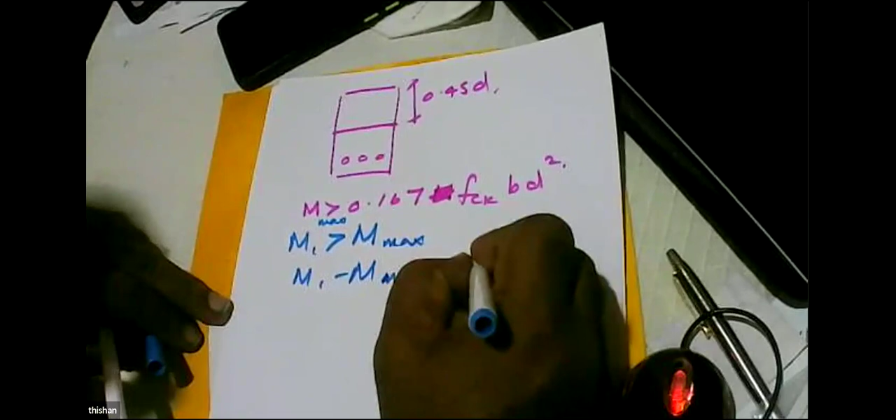Right, so basically what I said was, if you have a huge moment, a moment greater than given by 0.167 FCK BD squared, then the depth to the neutral axis is 0.45D, and we'll need some reinforcement to carry the moment, giving a moment M1 greater than M max. M1 minus M max is the extra moment, and it has to be carried by the compression reinforcement, A S dash, FYK divided by 1.15, multiplied by D minus D dash. So this is force multiplied by lever arm.

So today is 17/1/2024, Civil Engineering Sectional Committee lecture series, lecture 7, page 1.

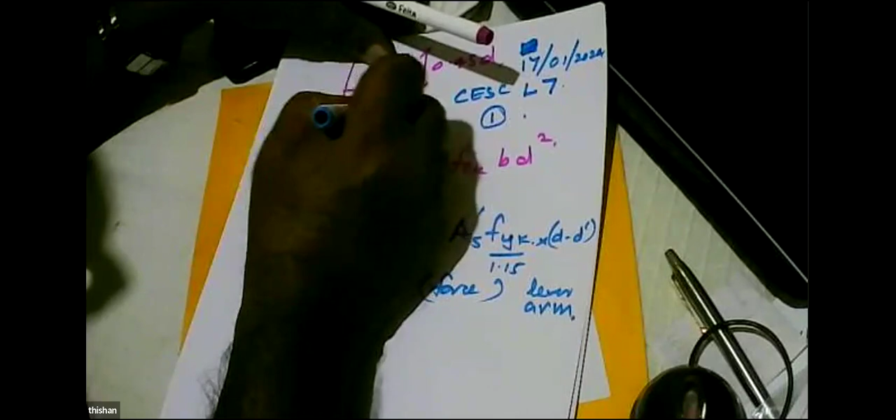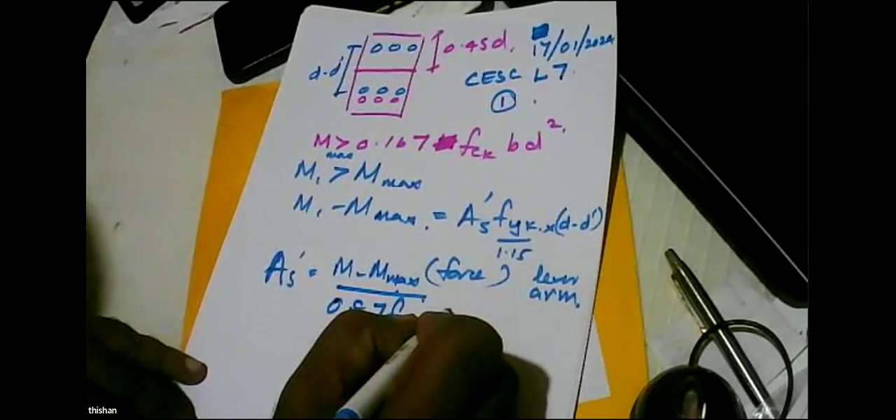So we need extra reinforcement, and this is D minus D dash, and that reinforcement can be found as A S dash M1 minus M max divided by 0.87 FYK D minus D dash. So straight away you can find the extra reinforcement needed for the beam to be doubly reinforced, because the moment exceeds the maximum moment capacity as single reinforced.

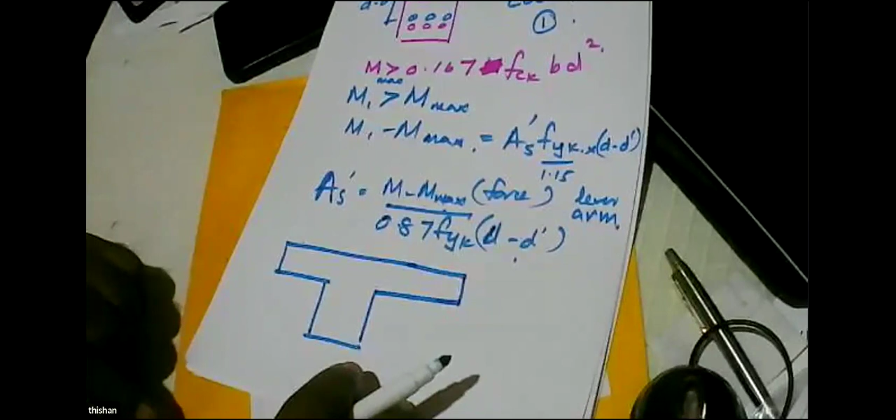Then I said, okay, these are not economical. Why? Concrete is a cheaper material, steel is an expensive material, so we should not use steel to carry bending moment. So what is better? Flange beam. But the important thing is the depth to the compression zone must be inside the height of the flange. Is that clear, Bandhuga? Yes, that is clear.

So I checked with our IT department. They told me it might be some issue from the computer, and they have given all permissions. Anyway, sir, we can clearly hear you now, no need for the phone.

Your background is muted, your video has stopped. Doesn't matter, this is working today, we will continue like this. Okay, right sir, okay.

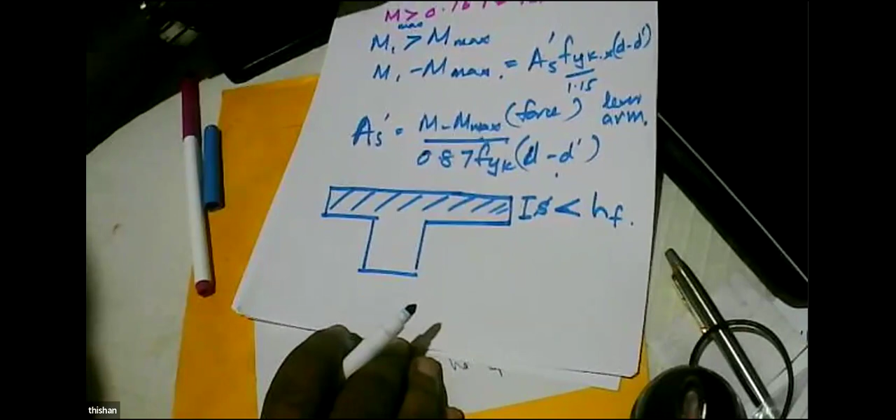So now the question. We have a continuous beam. So how does it deform? It deforms like this. So here tension in the bottom, tension at the top, tension in the bottom, tension at the top, tension in the bottom.

So here, if it is a flange beam, here your tension, so what is effective is only this. Here, tension is here, what is effective is this. That means it's a flange beam. In the span it's a flange beam, over the support it's a rectangular beam. Is that clear, Bandhuga? Yes, that is clear, sir.

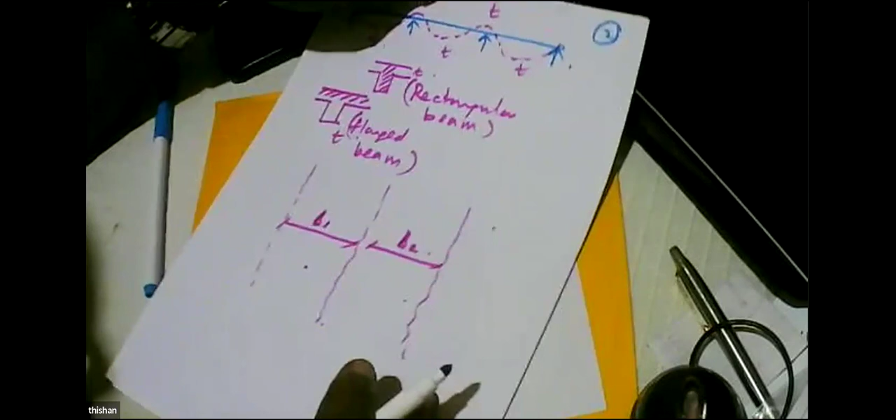Right, okay, excellent. Now let's look at the scenario. These are beams, so you get these as L1, L2, and so on. Sorry, B1, B2. Right, so this is a plan view, and the slabs are like this. Then we have the supports, and these supports are the same as these ones. These are supports, so the beam is continuing like this. So these are L1, L2, L3.

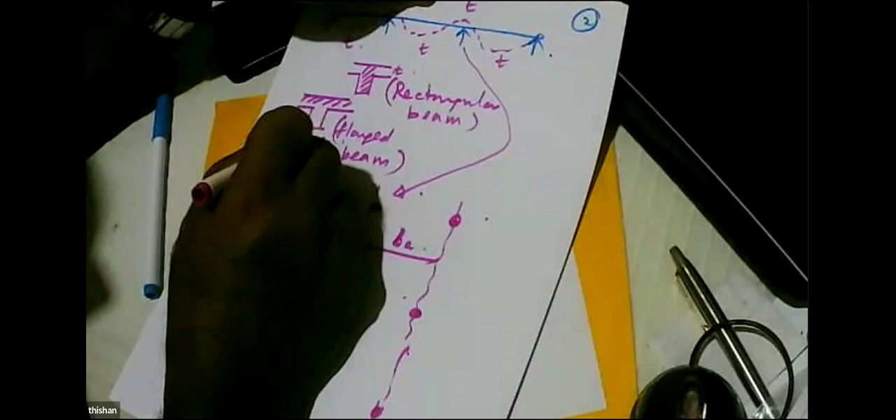Now, what happens is we have an effect called shear lag. And shear lag makes plane sections not plane. Plane sections not plane. What do you mean by that? What is the meaning of that? You have learned this formula. What is that formula? The famous Bernoulli equation, we generally call it the Bernoulli formula.

And here, what is the assumption? Plane sections remain plane, strain diagram like this. But what happens is this bending somewhere here, if you draw the stress distribution in the flange, it will take a shape like this. So that means you can't say the stresses are uniform in the flange. They are more close to the support or the beam. So we say we have an average value, but we have a restricted width.

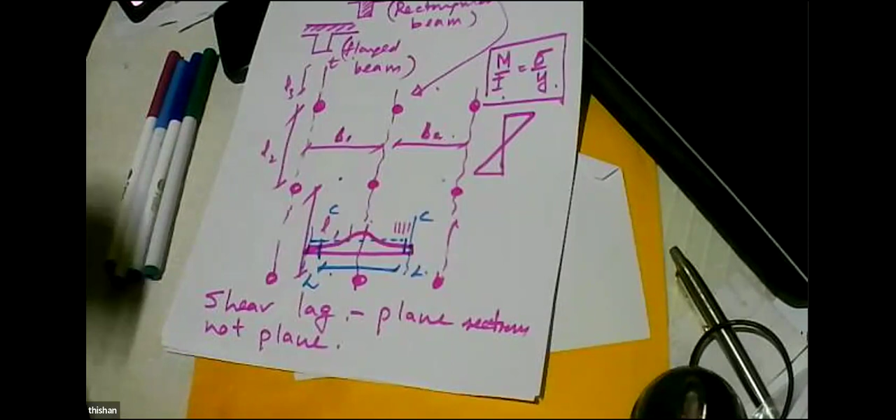If you haven't learned about shear lag, it will make the plane sections not plane. That means the stresses are not uniform, they are like this. On the flange, they are like this. So we cannot use the full distance from the center line of the slab to the center line of the other slab. We have to have a restricted width.

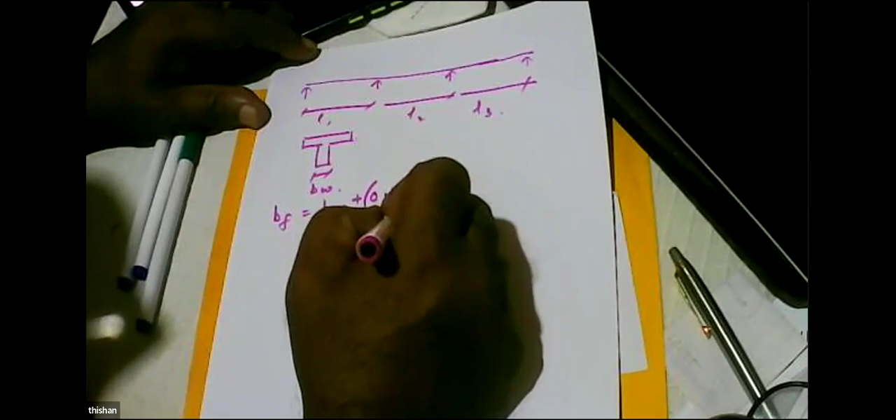So in the British code, finding the flange width is very, very easy. Same as in Eurocode, but Eurocode is a little complicated, but there's nothing to it. So what British code said was, you get L1, L2, L3. So if it's a flange beam here, with web width BW, B flange is equal to BW plus 0.7 times L1 divided by 5. If it's an L-shaped beam, slab only on one side, B flange is equal to BW plus 0.7 L1 divided by 10. Very simple. Now you might ask, what is this 0.7 L?

You draw a bending moment diagram. 0.7 L is the distance between points of contraflexure. Here it should be 0.85 times L. There should be 0.85 times L. Distance between zero moments is called 0.7 L. It is equal to 0.7 L. They have considered it as equal to 0.7 L. Is that clear, Bandhuka?

I think Bandhuka is disconnected. So can somebody else tell me whether it's clear?

Yes, it is clear, sir. Good, please give some feedback because I'm a little concerned whether I have lost the contact. So when I ask a question, just say yes or no, that's enough. So Bandhu, my connection was lost and I just rejoined. I thought your connection was lost. Okay, yes, sir, right.

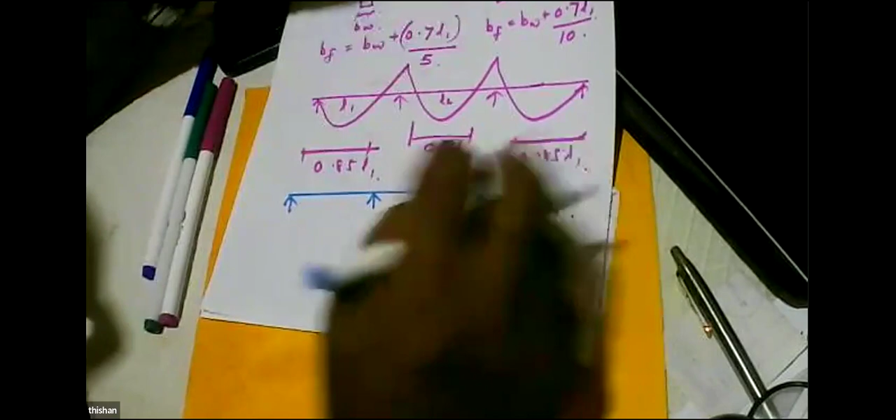So now, Eurocode is different. Eurocode has brought a lot of other parameters. In Eurocode, BF depends on BW, a function of BI and a function of LI. In British code, it's a function of span of the beam. But in Eurocode, it's a function of the distance between the beams and the distance between the supports. So this is the distance between beams, and this is the distance between supports.

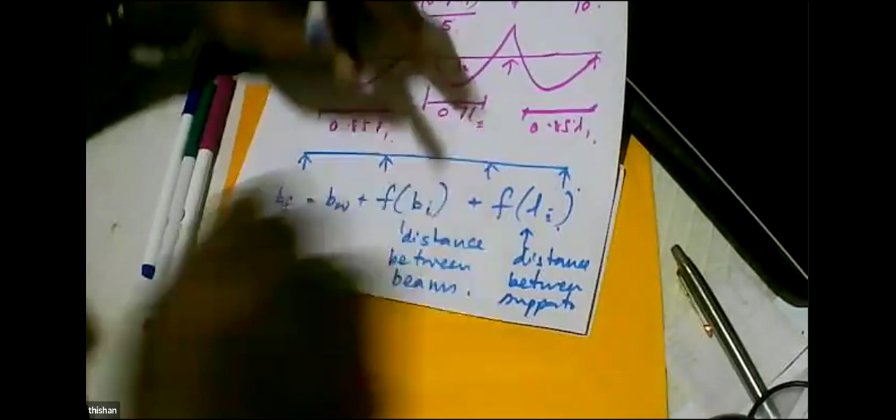Eurocode also gives the same diagram, it cannot change because it's from fundamentals. This is 0.85L, this is 0.7L, so each of these will be 0.15L. Here also it will be 0.15L, and here also 0.15L. Okay, got it?

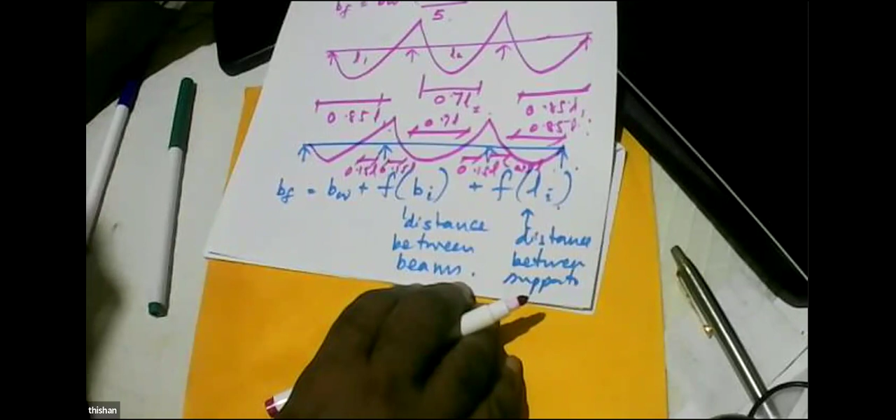Bandhuga? It looks like Bandhuga has again lost connection. Now I'm going to share the screen.

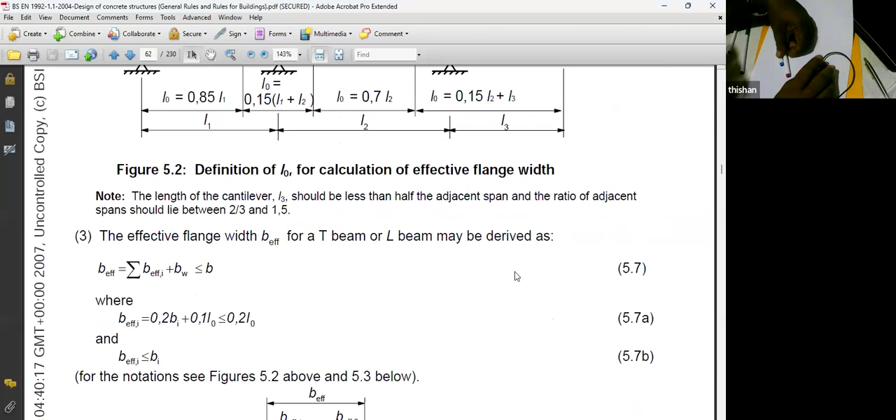Here you go. It gives a lot of diagrams, right? So effective flange, width of flanges, all limit states. Can you see 0.85L, 0.7L, 0.85, 0.15L, or the support?

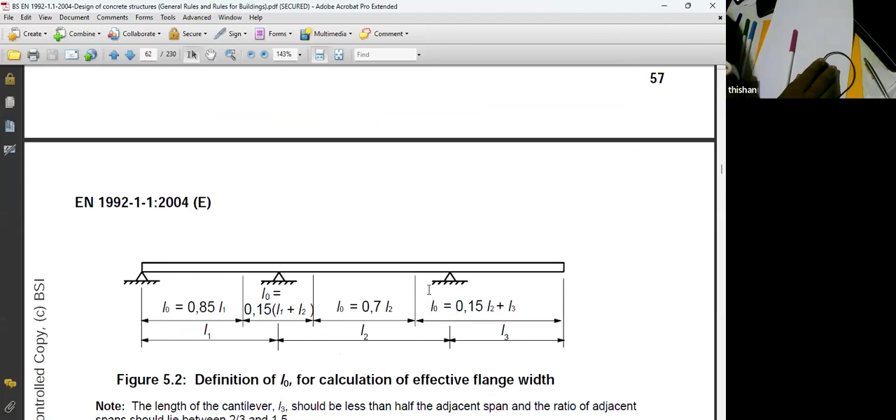And these are for a cantilever. The effective length has to be taken as 0.15 L2 plus L3. So it says 0.2 times B1 plus 0.1 L0, but should be less than 0.2 times L0.

So B effective from one side. So what it says is, if I write it in a simple rule, B flange is equal to B web plus 20% of distance, 20% of span of the slab, plus 10% of distance between point of contraflexion.

So for an example, let's say we are having a beam going like this, and these are 4 meters, let's say 5 meters. This span is 7 meters. The typical situation, this span is again 7 meters, or let's say internal span is 8 meters. So what is the flange width from this side? This is the flange beam.

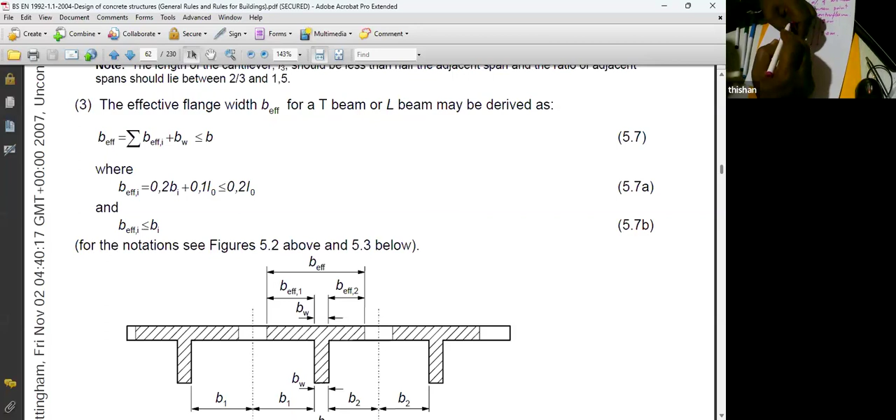What is this side? Sir, excuse sir, we couldn't see the notes, sir. Oh yeah, okay, hang on. Yes, sorry. It's good that you told me.

Right, so the rule is F is equal to BW plus 20% of span of the slab, 10% of distance between point of contraflexion. So what is this side? So BF left, I'll say left, is equal to 20% of 5 meters, 20% of 5 plus 10% of distance between point of contraflexion, 0.7 times 7.0, but has to be less than 20% of 0.7 times 7.

So let's calculate, Madhu, what is this? 1.0 plus 0.49 should be less than 0.98. Is that right, Bandhuga?

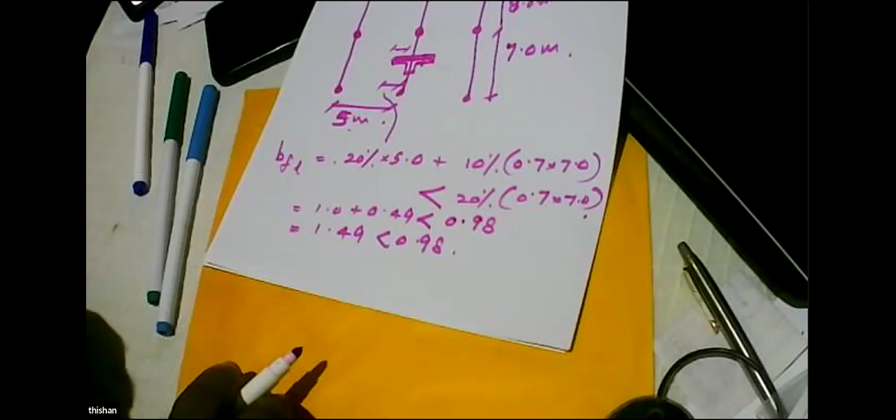So what is governing then? This 20% rule is governing. Is that right, Bandhuga? 20% of 1 is 1, 20% of 5 is 1. 0.7 into 7 is 4.9, 10% of 4.9 is 0.49. And 20% of 4.9 is 0.98. So 1.49 should be less than 0.98. So which is governing? 0.98 is governing.

So the width of the flange beam is, say, this 300 millimeter rib. So this side 0.98, this side 0.98. So 98, 98, so 1.96, 2.26 meters. Is that clear? Yes, sir, right? Because it's symmetrical, I have considered the same value on the other side, so altogether 2.26.

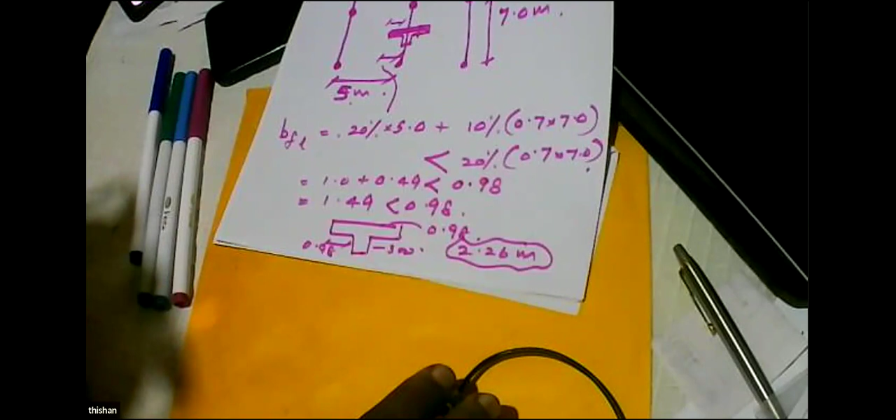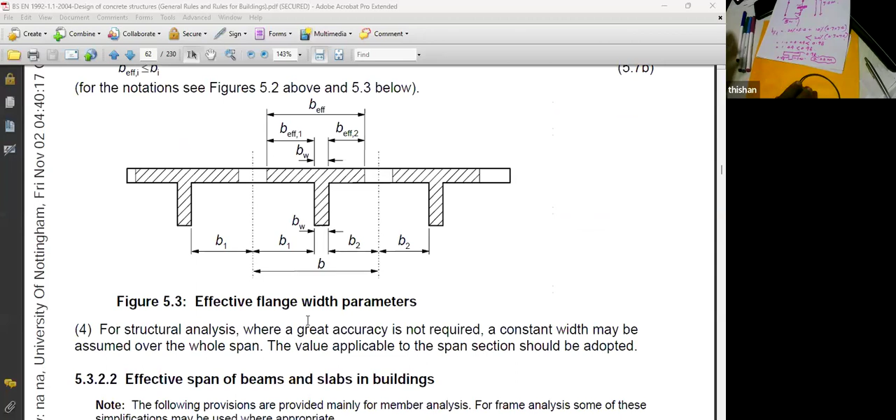So if you look at the diagram, it's very, very complicated, so don't look at it too much. Just memorize the rule, because you see this diagram, there's a lot of things. So you have a diagram, a lot of equations, and then this diagram. But the meaning is simple.

So what would you use, the rule like this or the code? To me, this rule is very simple. So we know 20% comes from the slab, 10% comes from the wing. What do you think, is it easy to remember or difficult to remember? But the total contribution cannot exceed 20% of the beam. That's on one side. The other side, most of the time they are symmetrical, so you can just add up the same value.

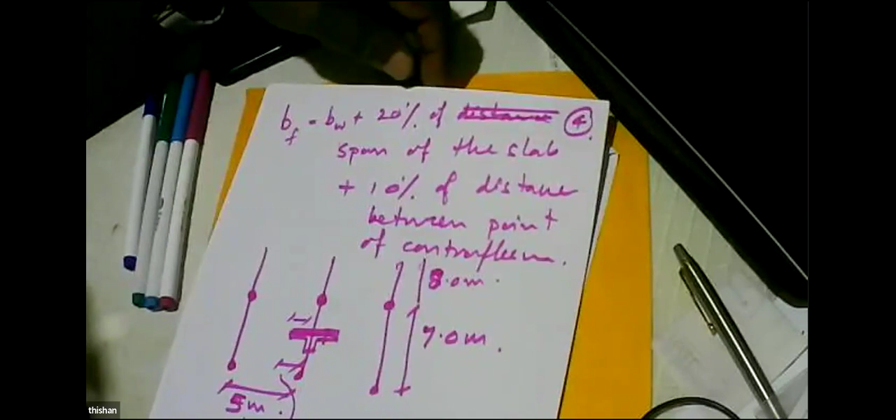What is the opinion? This simple rule, is it simple, or do you want to look at the code? I prefer the simple rule.

Simple rule is easy, sir. Yeah, because now if you are a good designer, you should have all these rules in the code stored properly in your brain, so you don't have to turn to pages in the code and waste your time. You are a good designer, all the rules are known to you, so even without using the code, you can still design. That's the level of ability you have to develop. So I prefer rules, why? Rules allow us to forget about the equation.

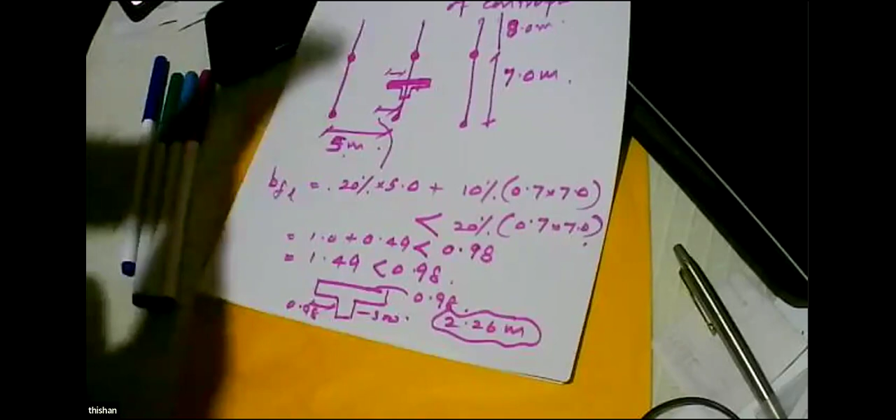Okay, sir. Right, so now let's say this slab is subjected to a load of 13 kilonewtons per meter squared. What is this magic number 13? It's 1.35 GK plus 1.5 QK. Now how do I get this magic number? For a house, what is the magic number? 8 to 9. For an office building, what is the magic number? 11 to 12. If you have extra loads in the office, it can be 12 to 13.

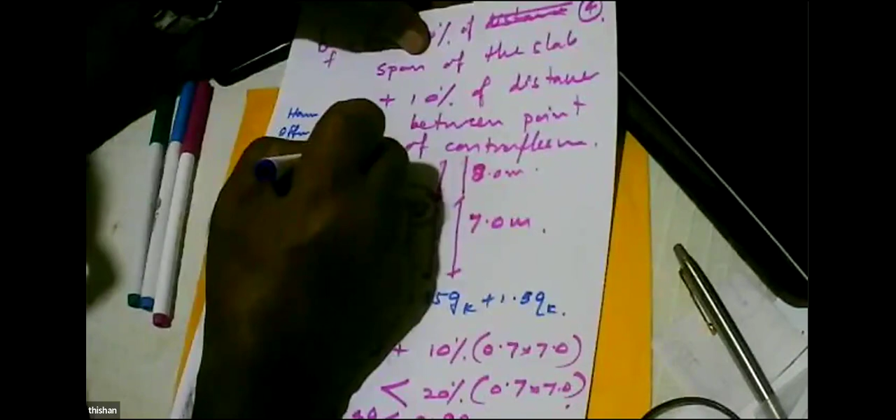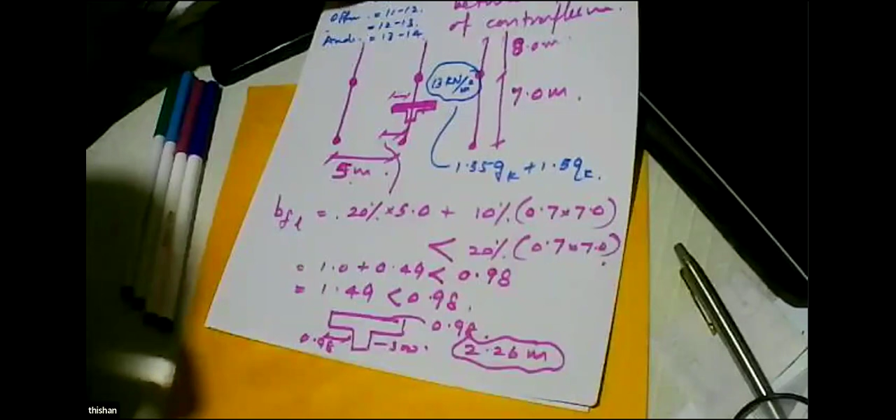You are unmuted and some disturbance is coming. Now I think I am unmuted. This is working. Yeah, now very clear, sir. Now very clear. Yeah, right. Now clearer? Yes, sir, now clear. Okay, well, I have turned off the computer, now I am on phone for sound. Okay, for video, I am on computer. So then it works well because I can monitor what's going on. On the phone I can monitor what's going on, otherwise I don't know what you see. Now on my phone I can see what you see. Okay, sir, right, that's why I use two devices.

That's a good strategy. Even if you are doing a presentation, use that strategy. Have two devices. For the audio, use the phone. For video and all the other stuff, use the computer. Then on your phone, you can see what the other people can see, what your audience can see, you can see on your phone. Then you can keep track of what's going on. It's very easy to do it that way when you are doing a Zoom lecture.

Right, so now okay, let's look at the example. Same example, what is the load? Load is 13 kilonewtons per meter squared multiplied by WL squared over 10. 7 squared divided by 10. What is the moment? 13 into... what is this answer? 13 multiplied by 7 squared divided by 10?

8.1, sir. No, it's 13 multiplied by 7 squared divided by 10. One minute, sir, one minute. 200 something. Seven squared divided by 10, WL squared over 10. Okay sir, oh but you have to multiply this by 5. Multiply that by 5. Yeah, 5 into 13 multiplied by 7 squared divided by 10. Some 200 something. 318.5, yeah, 18.5 kilonewton meter.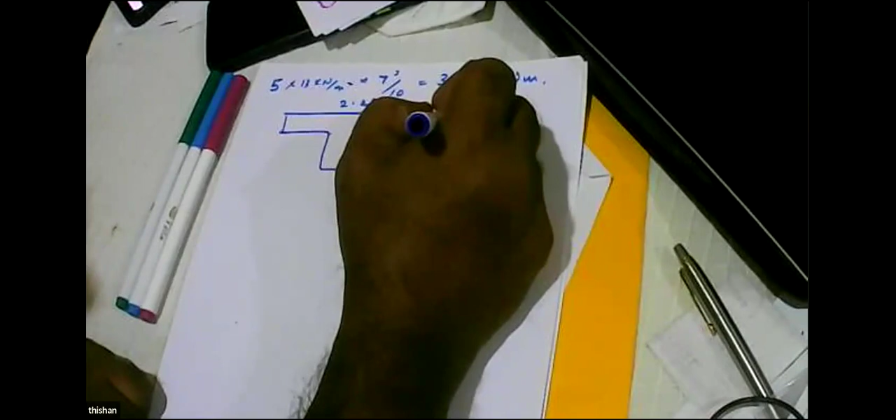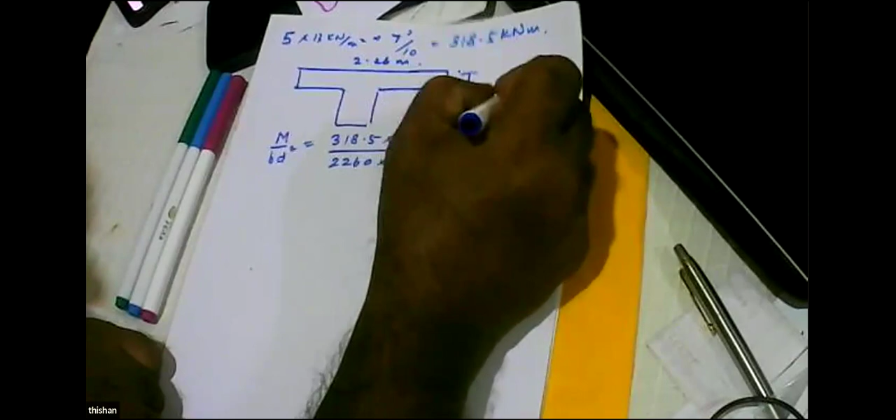Now you want to design this flange beam, and I will assume... so how do I design it? I have to find M over bd squared. I am using the shortcut method, no? 318.5 into 10 to the power 6, divided by breadth 2260, multiplied by, now this is 600 millimeter deep. This 600 is a magic number. You generally don't use a beam depth more than 600 under normal situations. Even up to 9 meters, you will increase the width of the beam and be happy. And generally you don't get spans more than 9 meters in a reinforced concrete building. Maximum span is 9 meters, because beyond 10 meters the design becomes very complicated, with additional deflections and all kinds of problems. So generally we go for a maximum span of 9 meters when selecting the grid, because 9 meters itself is huge, it's a 30 feet span. So depth is 545. What is the value?

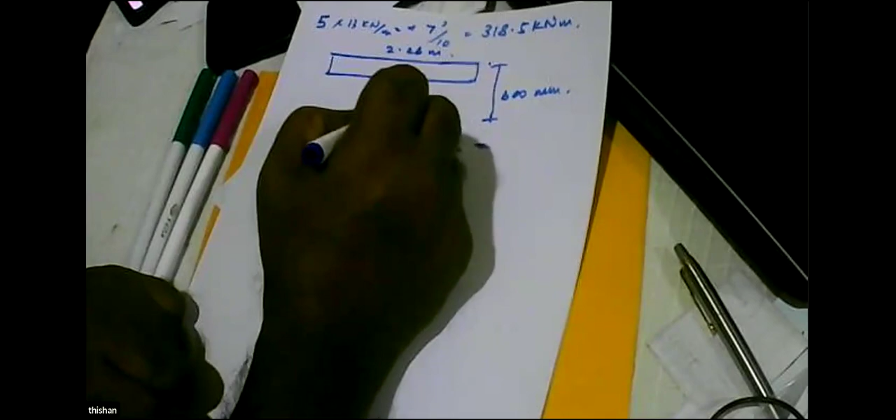So it's 1.2, something, 0.47. 0.47, that's right. Then what is 100 As over bd? Divide this by 4. 0.12. Okay, yes. Then what is A?

A is 0.12 multiplied by breadth 2260 multiplied by 545 divided by 100. What is A? 1,478.05.

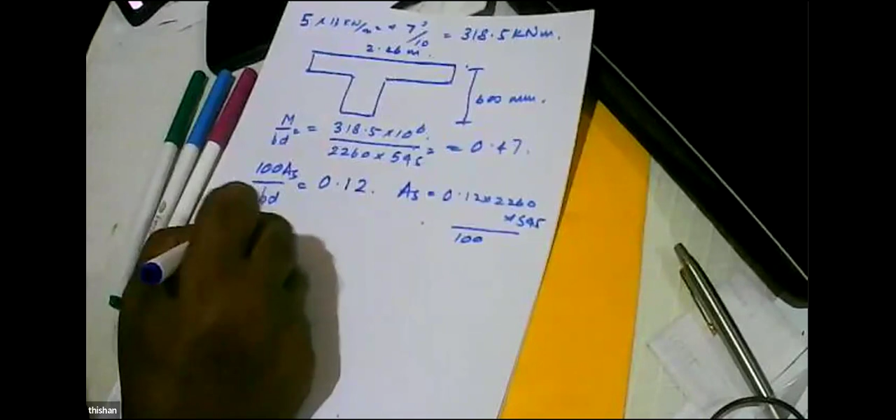You will write 4 numbers, 3 numbers of 25 diameter. Or you can write 2 numbers of 25, H25, 2 numbers of H20. So that is 314 into 2, this 490 into 2. What is the total area?

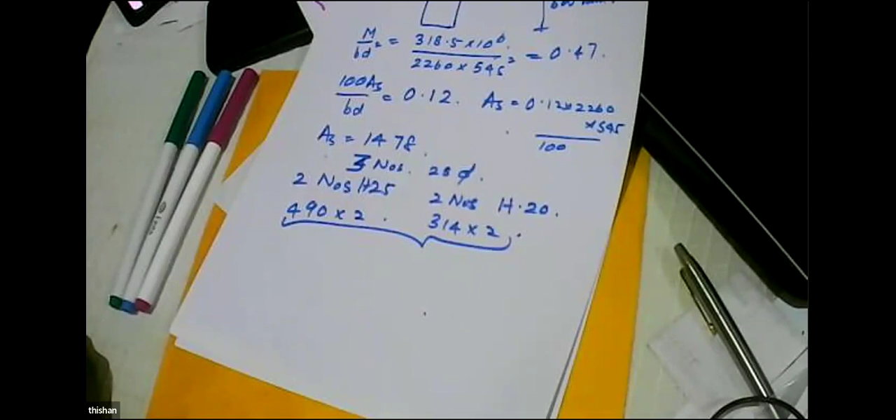1,608. When we need 1,478. Is that clear? Yes, clear, sir.

Now if I select this one, 490 into 3, 1,470. Marginally low. Now why do I select? If you want, I can select this also, because if I do a proper calculation this will be okay, because I use slightly higher 0.12 instead of something. So 1,470 is also okay. But I select 1,608. Why?

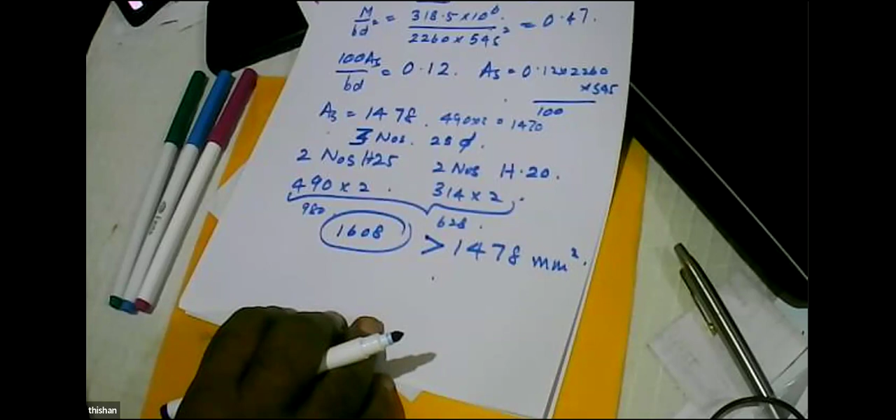Because I always provide slightly more reinforcement in the span section. What is the reason? Beams never fail at the support. Beam fails only at the span. So in the span, no harm in providing some extra reinforcement. Is that clear, Bandhu? Yes, clear, sir.

That's the reason. So now we have to make sure S is less than HF. So I say area of reinforcement. Force in concrete is equal to force in steel. So what is the force in concrete?

0.587 fck multiplied by breadth 2,260 multiplied by S is equal to 0.87 FYK multiplied by 1,478, the area. From this I can calculate S, because fck is 30.

FY is 500. This 500, this 30. What is the only unknown? Only unknown is S. Then you can find the value of S. You might get about 40 millimeters. What is the value for S, Bandhuka?

Wait, sir. You might get about 40 millimeters. 16.15, sir. 16.15. 0.87 into 500 into 1478 divided by 0.587 into 30 into 2260. Yes, this is very low, huh? Yeah, 16.15.

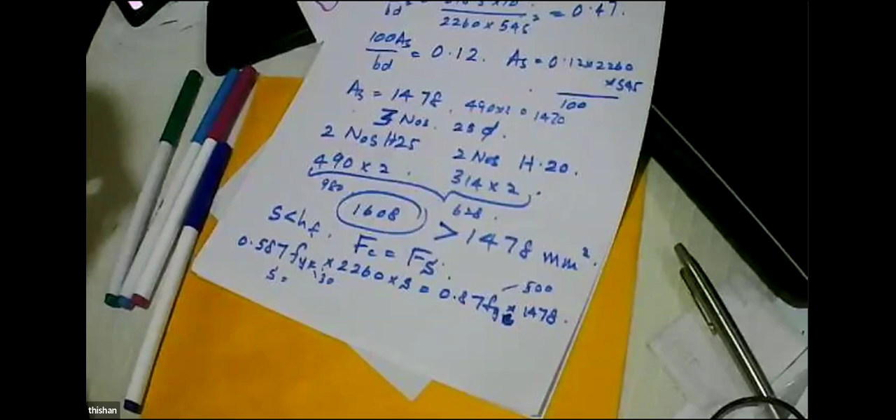Doesn't matter. What the requirement is, it has to be less than hf. Okay, so now you provide this reinforcement. Will it ever fail? It will never fail, provided that you include some reinforcement here across the beam, so that no shear failure can occur here.

So I have not covered shear to teach you how to find this reinforcement, but for the time being we'll say we are going to provide some top reinforcement anyway, and then when you are providing the bottom reinforcement, my detailing is I continue this reinforcement here, I continue this reinforcement here, so there's full lap here, and that will also provide some extra resistance for shear cracking.

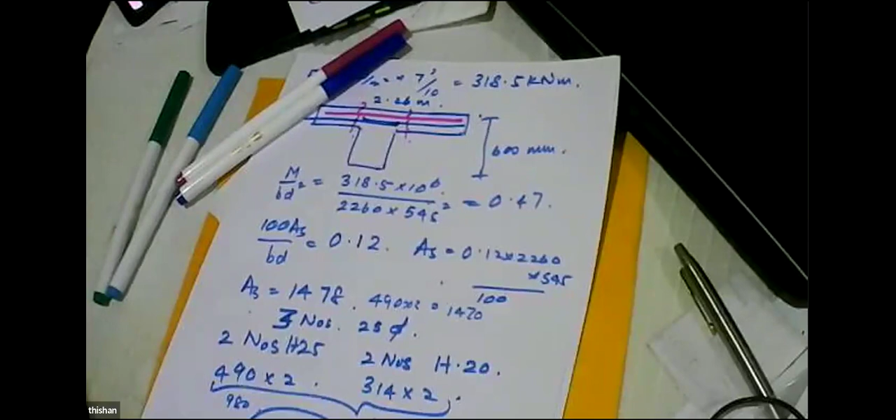So I will provide top reinforcement and bottom reinforcement, but top reinforcement is continuous, bottom reinforcement has a joint, but the joint is done properly so that there's plenty of reinforcement across the flange to make sure the flange never fails. Is that clear, Bandhu? Yes, that is clear, sir.

So I will not just provide to the middle, but I provide to the very end on the beam, right? And if you make a small bend also, that is even better. Then it has better, and then the flange will never ever fail. So you'll have a super strong beam. Is that clear? Yes, that is clear.

So I have covered flange beams, doubly reinforced beams, singly reinforced beams. So beams are over, I think. Is that right? Yes, correct, sir. And also I explained moment redistribution. So everything on beams have been completed, and we can start shear today. Okay, sir.

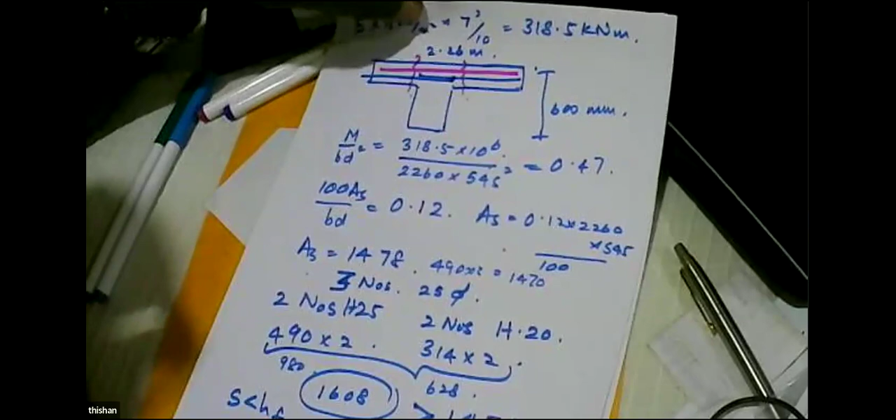Right, so I will actually talk a little bit about torsion also. Shear can be many different types, because engineers generally don't have much idea about torsion. So it's better to tell something about torsion also when you talk about shear.

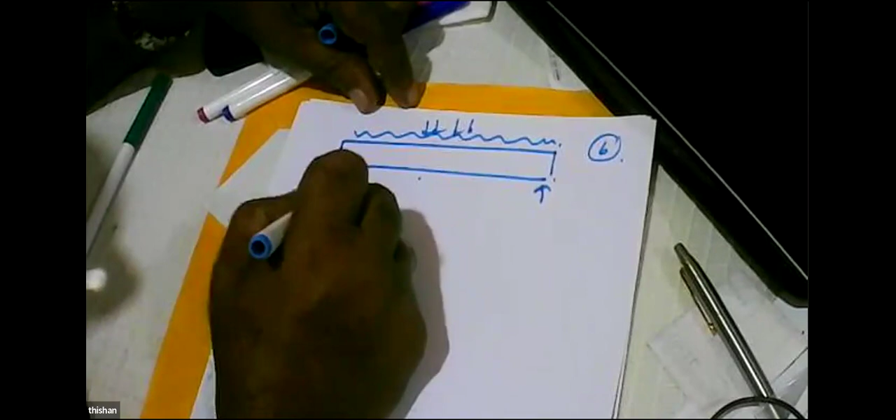Then we have a beam, we load it, so we are applying the load here. Where are we resisting? Here. So we must have shear. And always flexure is associated with shear. But there's another type of shear.

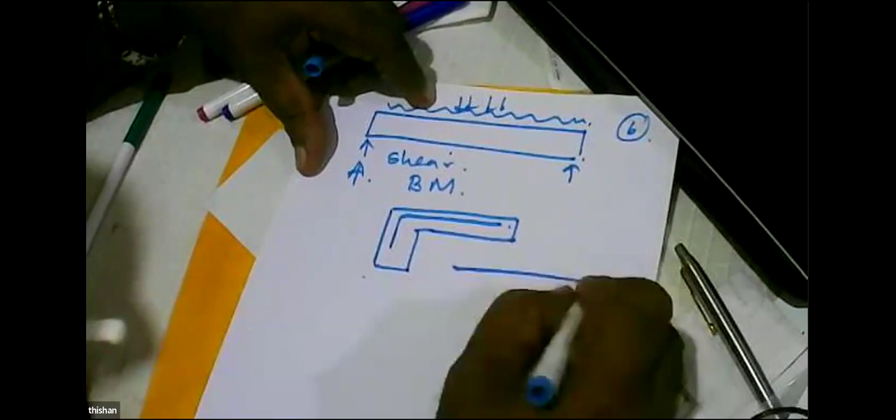Let's say we have a beam, we have a slab here. Slab is cantilevering from this one, and beam is like this, connected, it's continuous. Slab is only here. What happens? When you load the slab, what do you get? Moment like this. And what is the axis of the moment? Axis of the moment is like that, along the beam. Any moment where the axis of the moment is along the beam.

Engineer Senaviratna, your mic is unmuted.

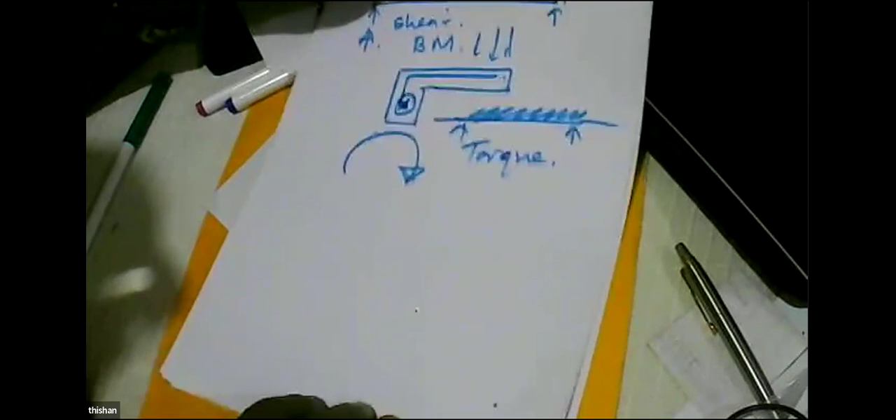Torque or torsion. Now, where can torsion happen in a beam? Let's say we have a transfer beam, 1.5 meter by 1.5 meter beam.

Where is the axis of the beam? Here, at the center. And we have a wall here. The load from the wall is coming here.

Why are we using a transfer beam of 1.5 meters by 1.5 meters? Because we are supporting few floors, or a wall supporting few floors on the transfer beam. So there's a massive load, maybe about 2000 kilonewtons.

Distance: these 0.75 meters, this 200 millimeter thick wall, so this 0.65. So 2000 kilonewtons into 0.65 - what is the value? 1300 kilonewton meters.

So what can I say about the beam? It's a massive beam, 1.5 meters by 1.5 meters, still it's subjected to torsion. We call this equilibrium torsion.

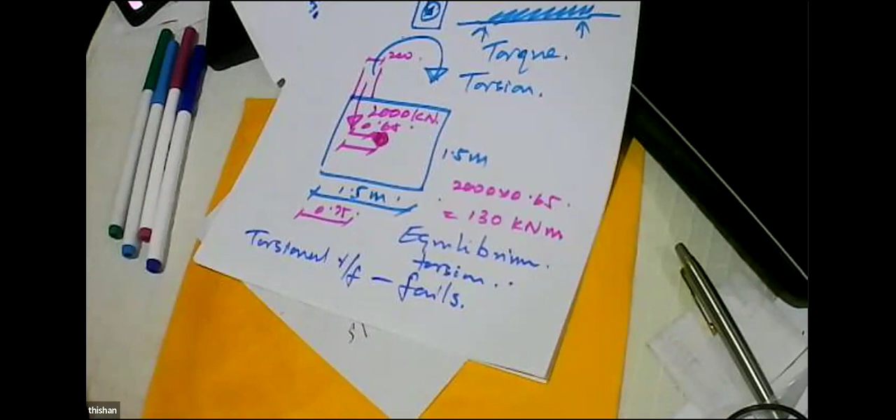But when you perform structural analysis using a 3D program, you get bending moments on the beams, you get shear forces on the beam - direct shear - but you hardly get any torsional moments. Why? Because we are applying most of the loads on the axis of the beam. We don't apply loads away from the axis of the beam. So you don't get torsion. So you don't have to provide a design for torsion, you don't have to provide extra reinforcement for torsion. But a minute amount of torsion can be there which can be easily resisted by concrete.

Is that clear? Yes, that is clear, sir. So I'll show you a note, I'll show a note.

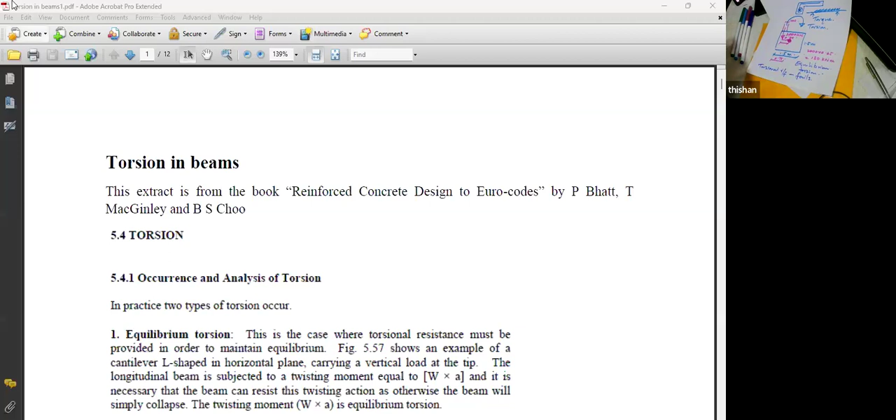So this note is based on that. So here, what do you get? Equilibrium torsion. What do you get here? Two interconnected beams, and it is compatibility torsion.

Now, when you connect two beams like this, even if you don't provide torsion reinforcement, it will never ever fail. So it's called compatibility torsion. But if you don't provide torsion reinforcement here, it will fail. It's called equilibrium torsion.

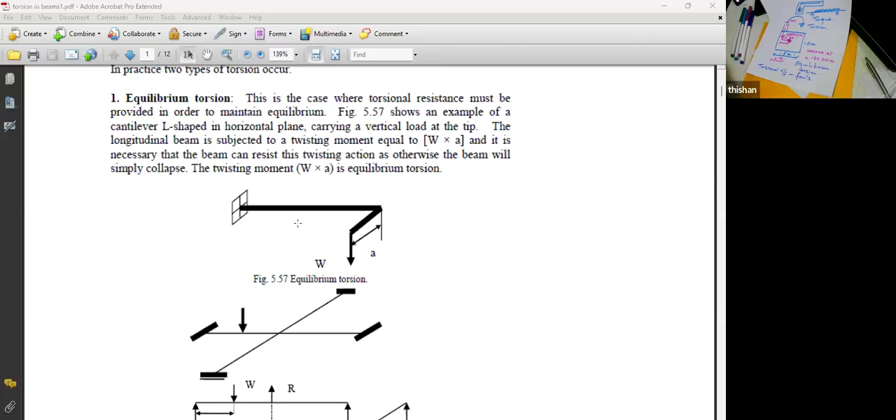And this theory is used very much when you are analyzing M beams and Y beam bridges. We say they are torsionless systems. The reason is what you get in an M beam or a Y beam is compatibility torsion, which can be taken into account by having a higher bending moment than anticipated in normal calculations. So we provide for it.

So what we do is, simply in Y beams or M beams in a bridge, we say we are going to have compatibility torsion, and we say the torsional constant is 0. The moment you say the torsional constant is 0, you get a higher bending moment in the beams, and you design for the higher bending moment, higher shear forces, and finally you find, though you are not specifically designed for torsion, you are okay.

So the torsion shear stress in a concrete section is like this.

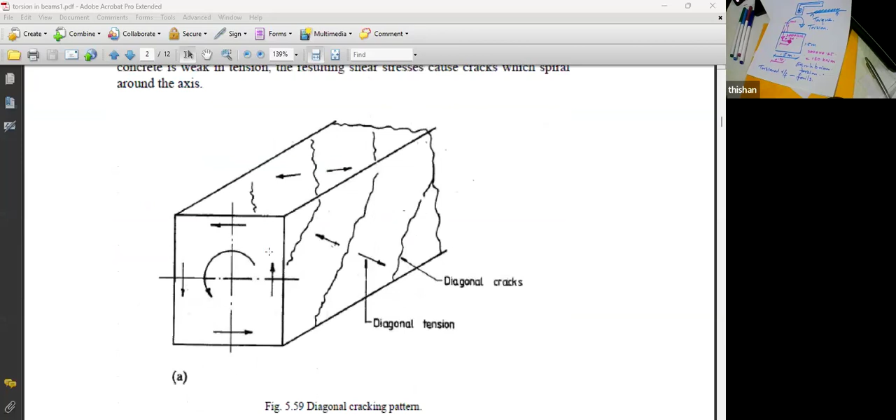And then if you have... Engineer Chalani, you are unmuted.

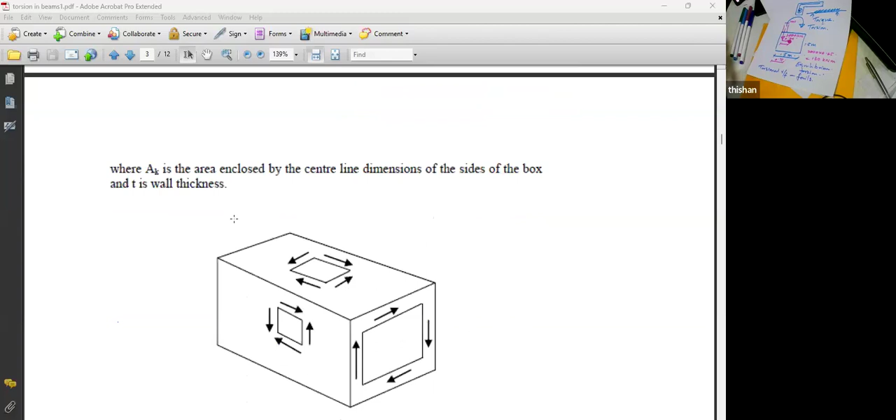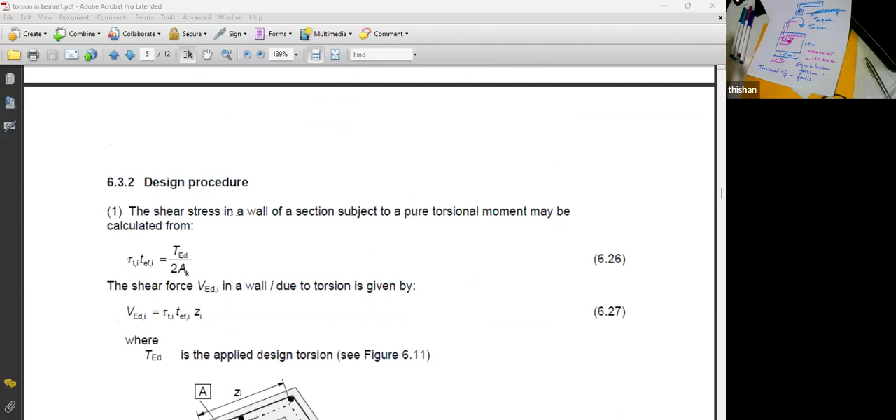If you have a closed section like this, the torsion and shear stresses are given by this equation, though that's not very important for you to understand. When you have a rectangular section, according to Eurocode, we consider it a hollow section and do the calculations. This diagram is directly from the Eurocode. When designing for Eurocode, you can see the type of diagrams and equations you have to fulfill.

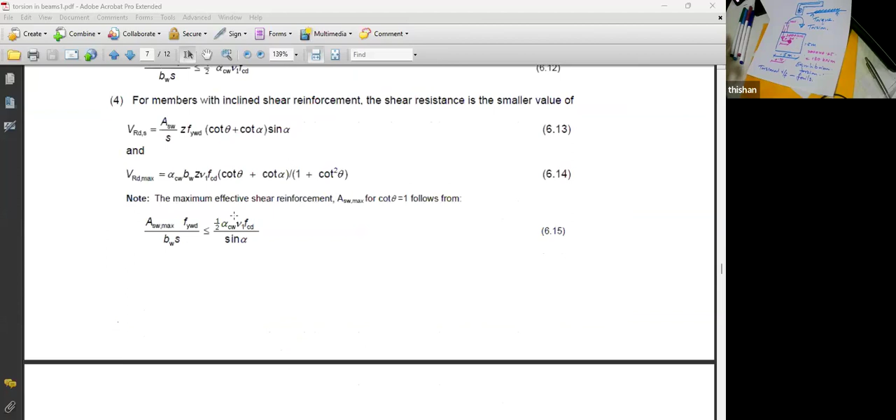It's very difficult to remember and recall all this. So what do you do? Very simple. All the theories are given, lots of equations, but what you're going to do is look at the example given by MacGinley on design for torsion. The example is included. The moment you look at it, you will understand how to deal with torsion. So torsion is not a major problem.

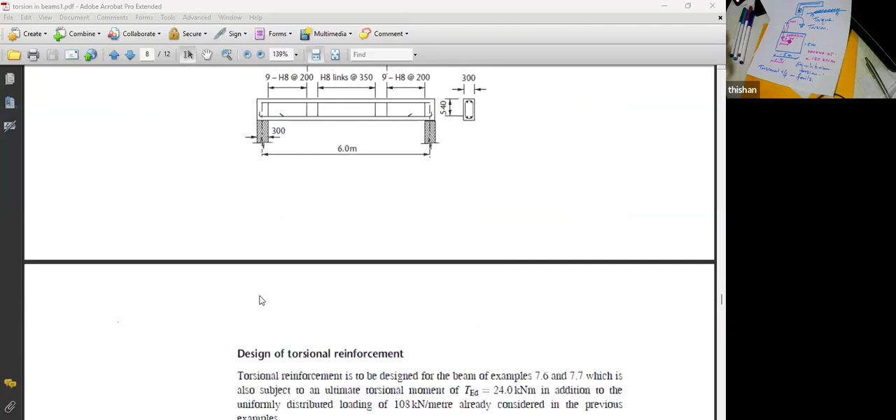You can see there's an example, and in the example, how to do the calculations is given. You have to go through the example and try to understand the method given in Eurocode, because if you try to understand this directly, you will never understand it. What is this? This is a code.

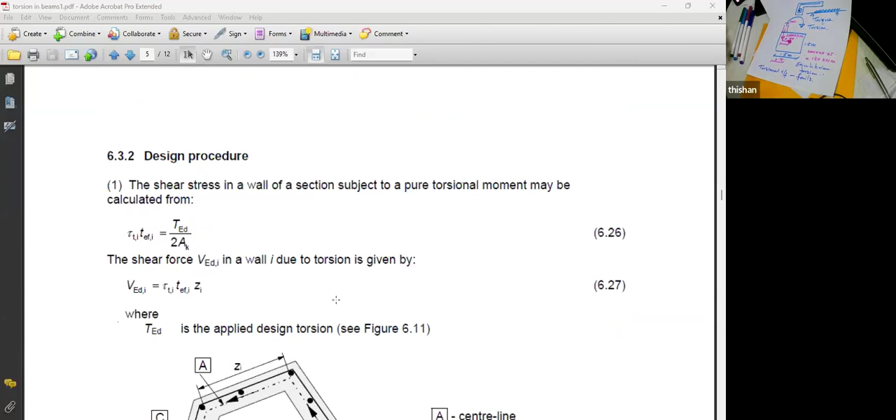Mandu, can you understand this kind of complicated stuff? What do you think, Mandu? Do you like all these complicated diagrams and equations? No, sir, it's very difficult to understand. Yeah, it's a killer. You don't do it.

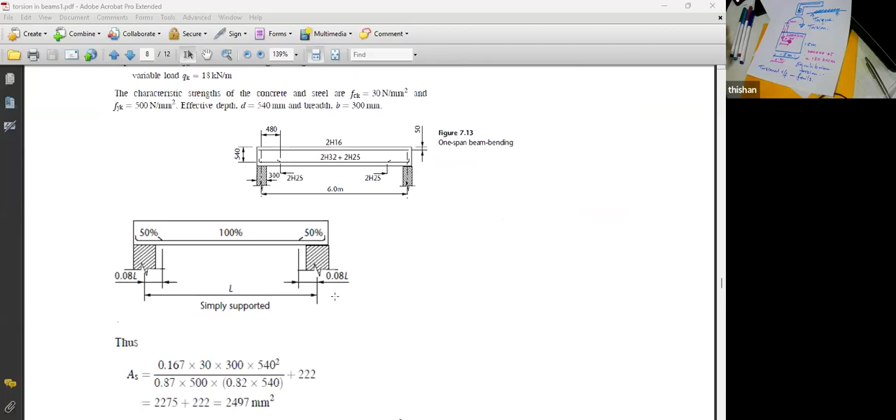Then what do? Forget about all that. Just go through it to understand what the provisions are. So all these are provisions, and then go through the example. Then you'll understand it's not that difficult, right?

So if we go directly to the example, yeah, will it be easy? No. Just look at the code before, just glance through it. You don't have to understand it, but you should make your eye used to it. And after that, go to the example.

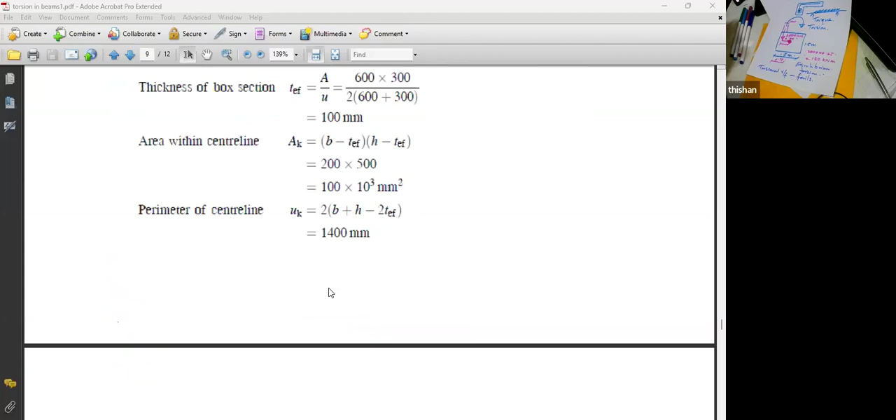But in the example, I have also given the code extracts. The equations are given. I have modified the example, taking things from the example and putting things in between from the code so that you will understand what you are doing.

So that's all. You can put it on the computer, write a spreadsheet for this. Otherwise, doing a torsion calculation is a killer, very difficult if you try to directly use the code. Why? Because the code covers all possible scenarios.

But when you are designing a beam for torsion, it's not a big deal. So what you do is go through the example and put it on a spreadsheet. Whenever you see a moment, you feed the moment with the dimensions, then the rest can be calculated.

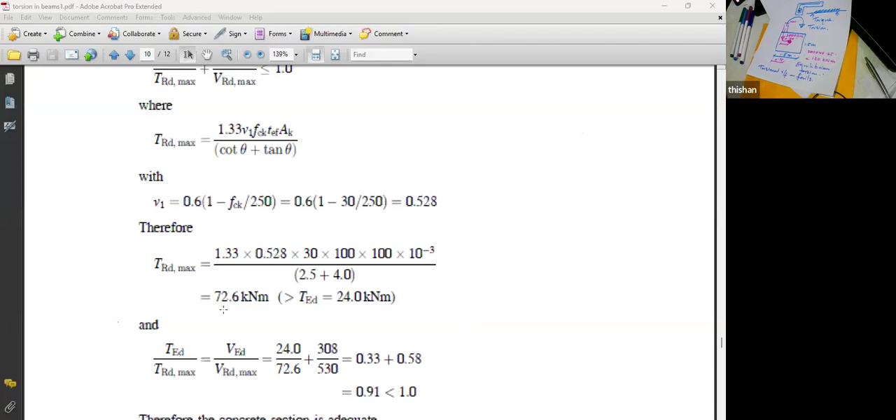Got it? Yes, got it, sir.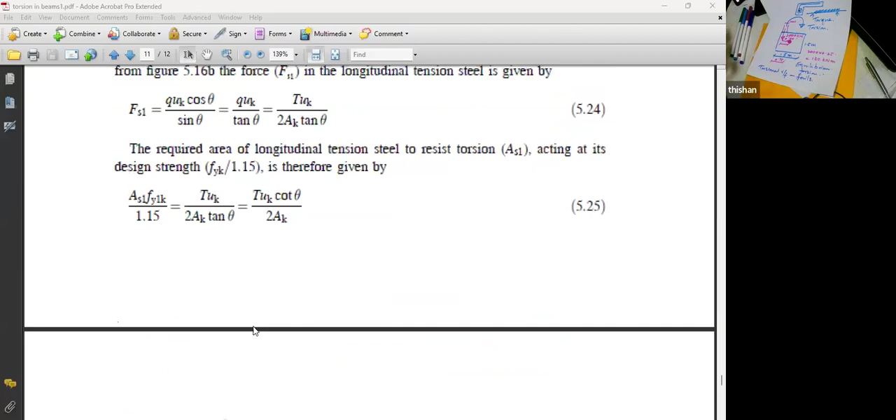See? Lots of calculations, lots of theories, a lot of proof, a lot of things. So I have put everything inside so that when you are doing the calculations and using the equations, you will understand why you are doing it. Whatever is relevant is in the note. How those equations are derived, everything is in the code. From the code, I have given small information. It's very easy, you just have to go through the example.

I think we have shared this note, Bandhu. Yes, that is in our Google Drive. Anyone can please go through and access the note. It's very easy to understand, not a difficult thing. It has an example. Just go through the example, and within the example also I have shown the relevant equations, so you can easily follow it.

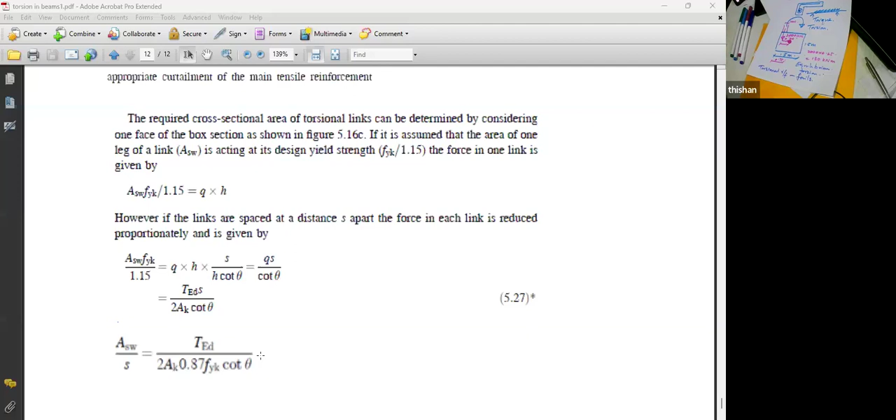In the textbook, the theory is at one place, example is at a different place. What I have done is put all together so that you can understand the theory and the example all in one go. Thank you, sir. It's a very valuable document, sir.

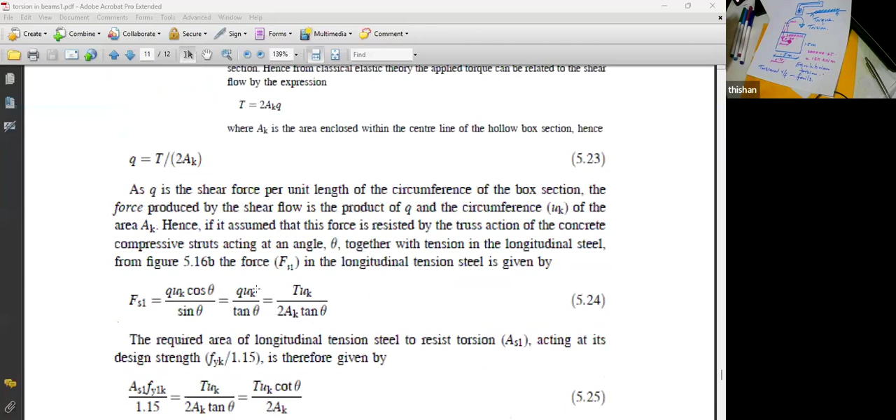Yeah, so please go through it, because it's very difficult to teach these things. These are the things engineers should read and understand. But a very good document is available for you to understand. It's better than the textbook now, right?

So go through this note and try to understand how you do torsion, but you have to understand torsion comes only where? Transfer beams. If you are designing a transfer beam of a 30-story building or a 20-story building, you have a transfer floor, then you must be very careful, very careful in modeling. Later, I'll show you how to do the modeling and how to get the torsional moments.

I can show it now itself. Just give me a small time. Just give me 1 second until I open the document. Okay, sir.

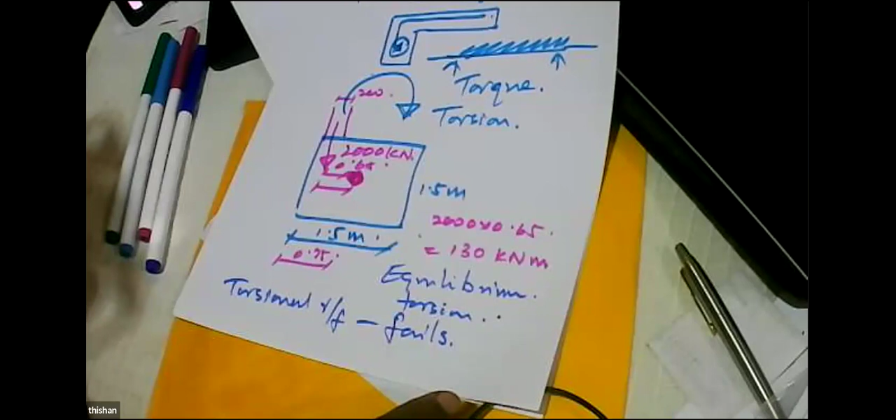Now you can see structural design of tall buildings. Can it be rule based? Can you see the title? Can you remember I told you about rules?

So what I say is, you don't need code. If you ask me to design a 30-story building, I will ask you to keep all the codes with you. I say, I don't want codes. You keep the codes, and within 1 week, without a code, I can still give the whole design with a challenge. What is the challenge?

If you find a single mistake in my design, I'll give you 10% of the design fee. If you find 2 mistakes, 20%. If you find 10 mistakes, I don't get anything, you get everything. And then I'll say, if you optimize my design by 10%, I'll give you 10%. If you optimize it by 20%, I'll give you 20% of the fee.

One question, sir. So how do we improve ourselves to reach that level of design?

You have to read the books, read them early in the morning, and see how the equations are derived. Then you have to see what rule is relevant, and make your own rules. So I have made my own rules, so I don't need codes. I can do all the calculations without having a code, because all the input technical data is stored in my brain. So I can do all the calculations without looking at the code.

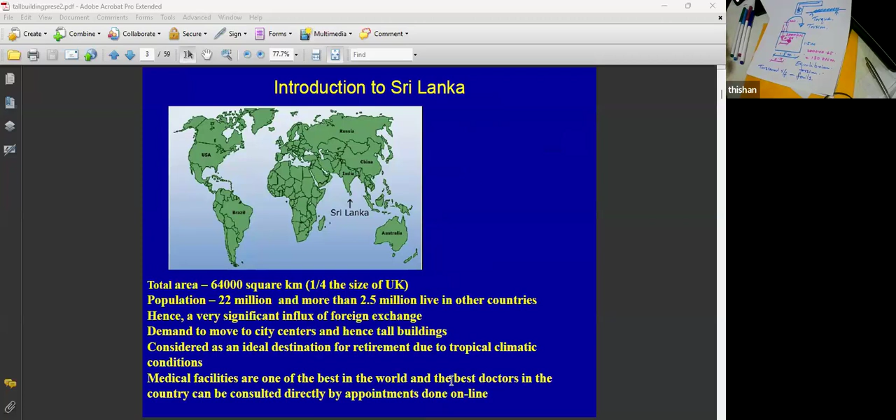This presentation I did in Liverpool University on 27th February 2019, before we got COVID. 1 year before COVID, we were at Liverpool University as visiting academics, and I gave a presentation. The students could not believe what they heard when I told them I can design without codes. I use my own rules. They had never heard a person say, I don't want codes - everything in the code is in my brain. Nobody had ever told them that.

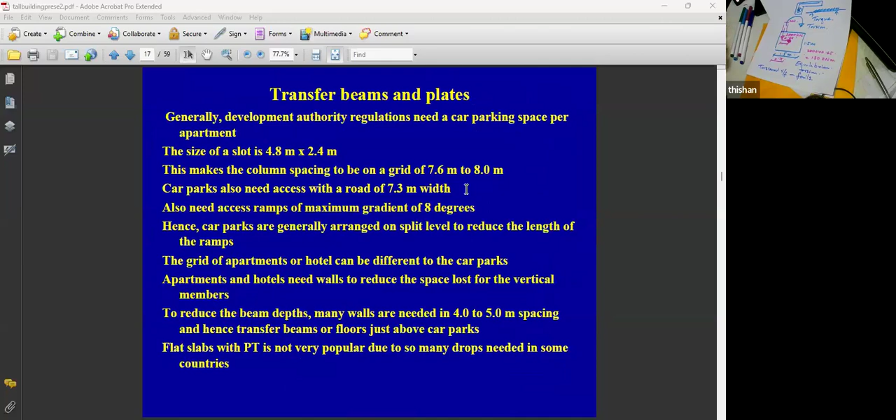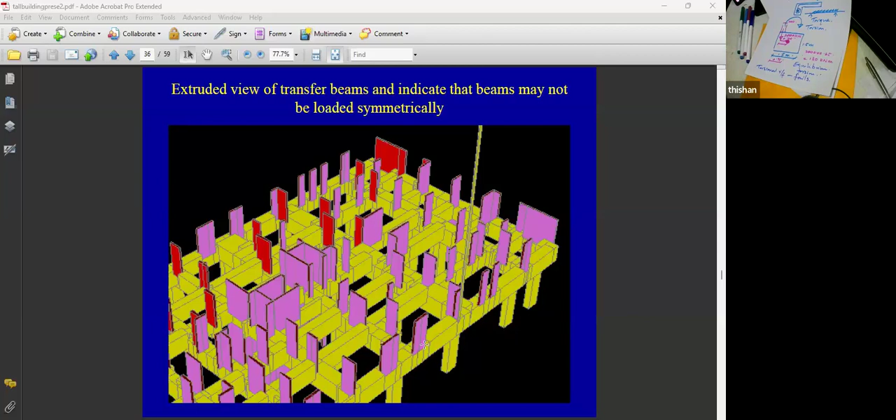So you can see, this is something I have shown you already. There's another important thing - can you see the piles? Yes, we can see, sir. And the pile cap? Yes.

What is this building? This is a building at Nugegoda called Porsche, close to what you call Valley Park, on the Open University Road from Nugegoda Supermarket Junction. On the Open University Road there's a road connecting to Pagoda Road, and just after that, you get this building on the left-hand side. It's a 14-story building.

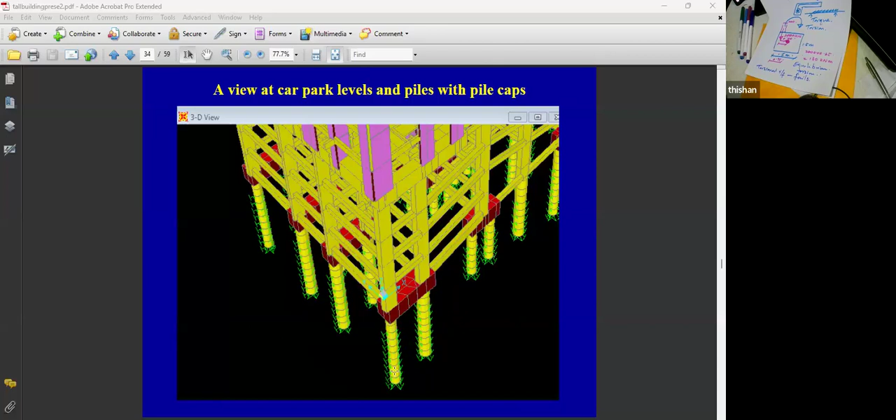So you can clearly see, we have modeled foundations, piles, foundations, columns, beams, transfer plates, transfer beams, and the walls above, everything in one go - very advanced modeling. Using what? SAP2000 - a simple program, but a very complicated model has been made. Is that clear? Yes, yes.

So, do you have the ability to create a model like this? If you don't have it, don't worry, I'm going to show you later. I have the license for SAP2000, so I'll show you how to use SAP2000 to create a model like this. And that's where the money lies, because if you have the ability to create a model like this, it will make sure you are eligible for big payments.

And the other important thing, you can see the transfer beam is coming and connecting here. You will find the bending moment on the column is much higher here than here. So what will happen - where will you get the highest reinforcement in the column, at the bottom or at the top? Just below the transfer level, you might find the reinforcement needed in the column is much higher than the reinforcement needed at the bottom of the column. Have you ever heard something like that?

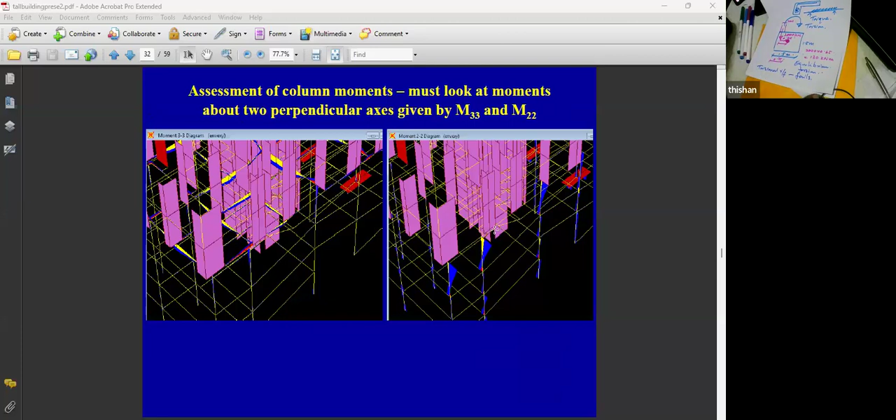This upper part had so many shear walls, the transfer plate was solid, so I made it a cellular transfer plate that helped them a lot - the company was building their own building, and they were losing a lot of money because the design had too much reinforcement, and we had to make it lightweight. So I did it with a model, and this is Cinnamon Red. The transfer plate is at the 10th floor level - just imagine casting a 1.5 meter thick slab at the 10th floor level, it's a huge task. So what I did was I made it all cellular transfer plate, where most of the unwanted material was removed, and I made it a beam slab structure, but I put a slab at the bottom, slab at the top, so it became a cellular, hollow structure, and that way we saved a lot of reinforcement, lot of money, lot of concrete, and we made it robust.

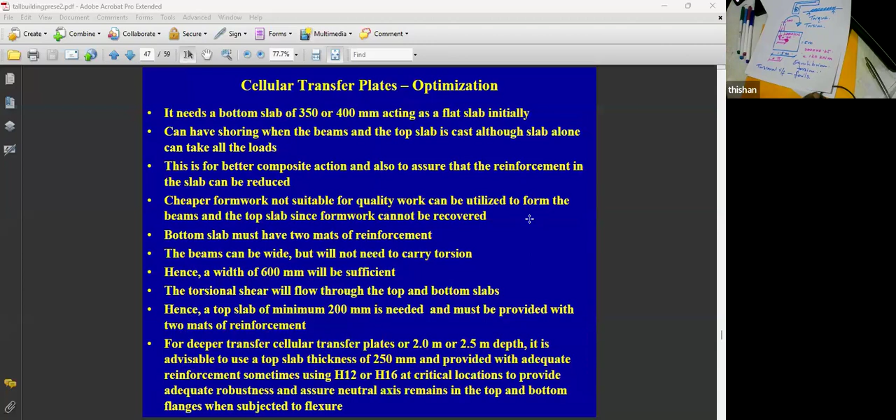So there's a lot of information that is useful, and how to model the foundations using springs, and so a lot of useful information. And with that, shall we wind up so we can start the proper shear, the flexural shear design next time?

Okay sir, there are few questions. Yeah, what are the questions, please? Yeah.

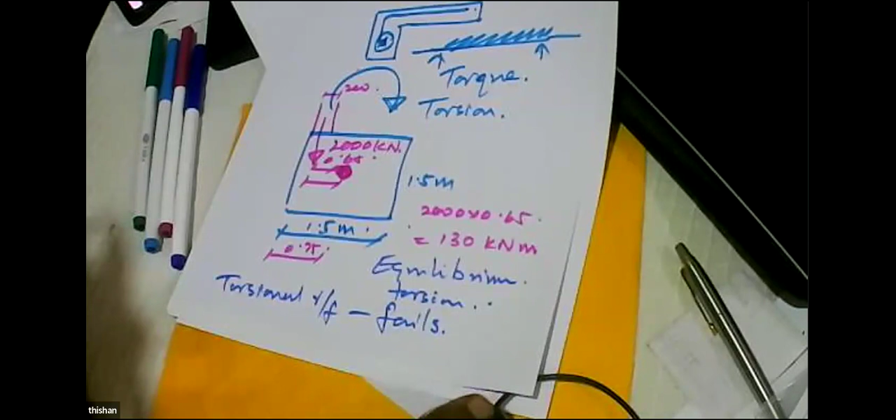Mute your mics. The connected walls and frames have to be weightless because they are additional members. Rigid links are used to support the eccentric walls.

What property modifier should be used? Basically, either you can use a small beam and multiply the I value by 1000, or you can use a big beam, and if you are using a big beam, you don't have to multiply anything. So one good option is to use a lightweight rigid arm and multiply the I value by 1000 — go to set modifiers and multiply the I value by 1000.

When modeling rigid links to support eccentric walls, property modifiers are needed only if you are using a small section. Otherwise, if you are using a large section, no property modifiers are needed.

Have I answered all questions? One more question, sir — actually two. One is, what are the detailing rules for torsion? How should torsional reinforcement be provided?

Don't worry, that is given in the example document. Just go through the document — the example gives all the torsional requirements and how to provide it. It's a calculation on its own, so just go through it, right?